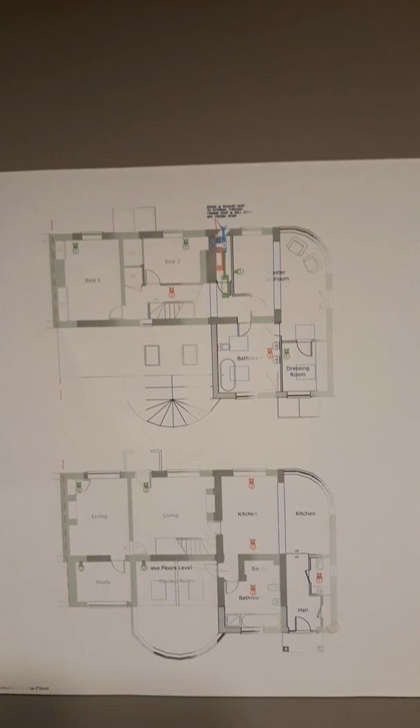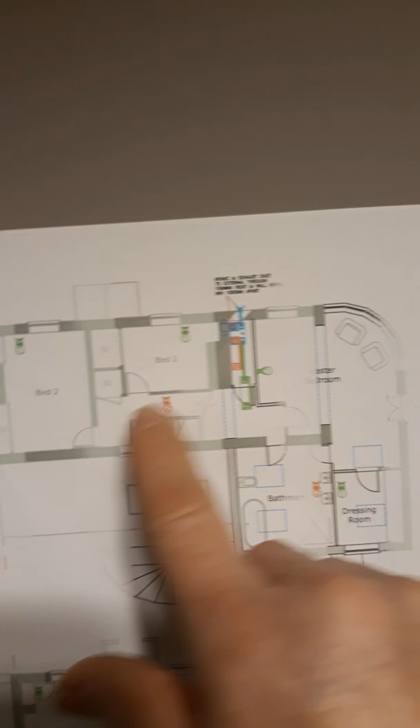Right now I'm stood on the first floor landing, right underneath where our man has proposed to put an extract. Essentially everything from this point going left is old and will have a traditional loft space, that's this whole area encompassing the plant room. That's all old, and everything this side is all vaulted.

This small area here will be loft space, just in this tiny bit of the landing area. This dotted line here represents an old doorway. This will be coming out.

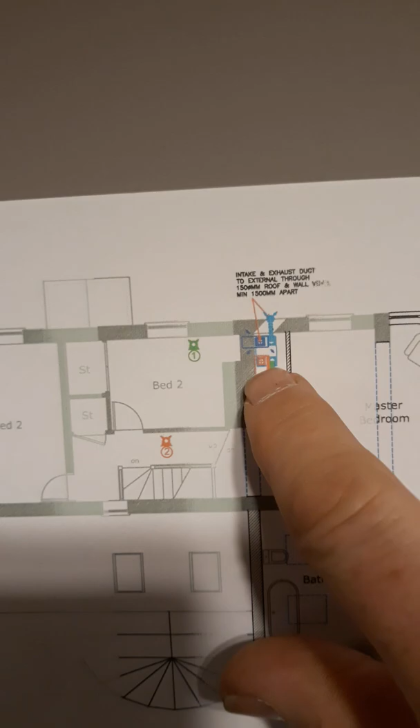So what we have here is the plant room, which will actually be underneath the last bit of traditional loft space. So all pipe work that comes from the plant room, going up to feed this point, this point, this point, will come up into the loft space and feed these areas here.

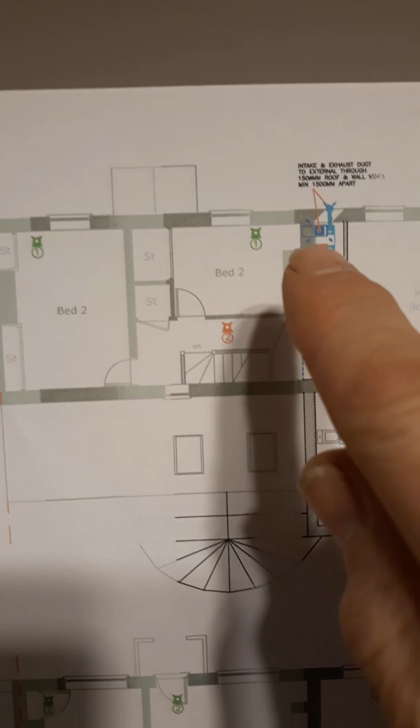That's reasonably easy. Now you remember I asked to move these supplies, because they were over here, to over here, because again we can take pipe work from the unit into the loft, up into the loft, and we can drop down through this store area here and this one in here to supply the living rooms which are underneath.

Because what we have is fairly substantial wardrobe space on that wall there, going into the end room, and that wall over there. We can drop the pipes inside that wardrobe space and into the rooms below.

Now you'll also remember I said about the study being a bit tricky to get to. The study also has a vaulted ceiling, so for this supply, what I suggested was we go from the plant room into the loft space all the way across the top and then drop down into this wardrobe here.

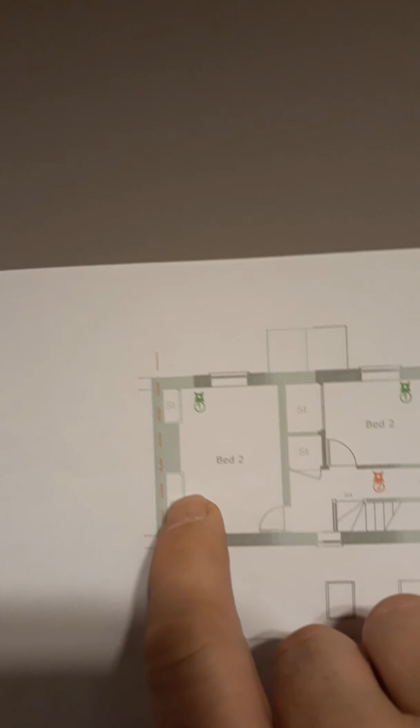Because what we have here is another wardrobe space in here which we can bring pipe work down into, but somewhere about here is the roof line of the study. So as long as we go through the wall somewhere from this point, or a little bit lower, and go straight through, we're now into the vaulted section of the study.

Something else worth pointing out is the fact that on the drawing you will see there is a step here. This step is going to be somewhere about here, and from here we will step up 8 inches. We had to do this because of access issues on the other side of the building.

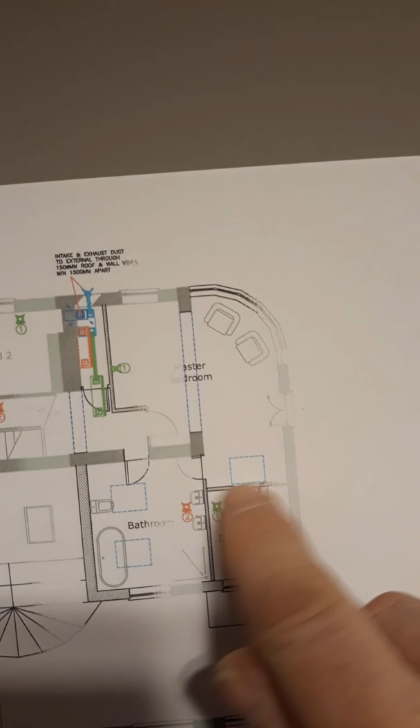It's important because all pipe work coming from the unit to supply the bathroom and the kitchen needs to go down, and we will use this 8-inch step that we've created over here to allow us to bring pipe work underneath to feed this bathroom. We can bring another line in and across to feed the WC that's downstairs, and then the other lines to feed the kitchen will also go across here through the joist work, because we'll be having that metal web joist work to feed that.

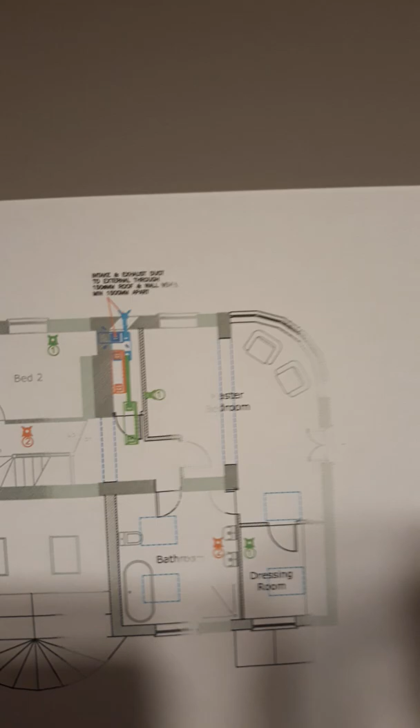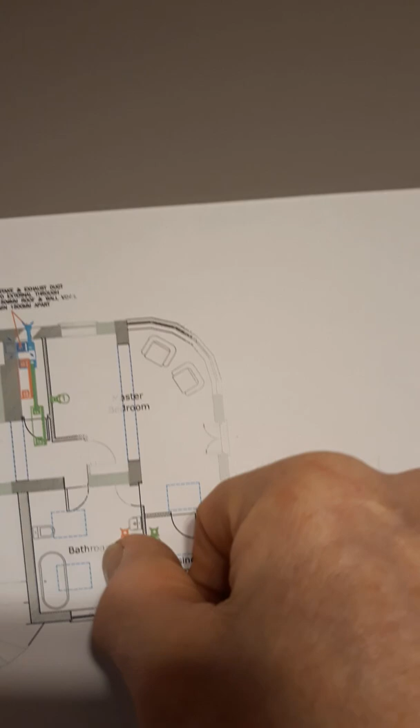That then leaves supply to the upstairs bathroom, which is a bit more tricky to explain, but basically there is a bit of a void going on here, and I can bring lines up, across, along the ridge line here, and then I'll be able to drop basically into the bathroom and then into the dressing room space as well.

So I'm hoping that's cleared it up a little bit. All lines that need to come up can come up into a loft space and go that way, and then all lines that need to go down can come across the floor here. In this space here, this floor will essentially stay, but it'll step up and create us a void, and then we can take lines straight across there to feed the bathroom.